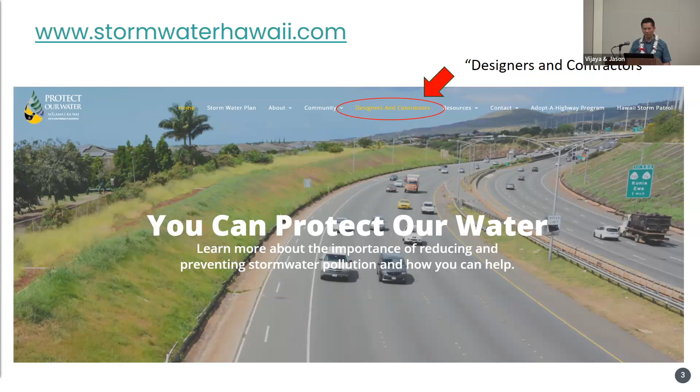For those of you who still have not downloaded a copy, if you go to stormwaterhawaii.com, they'll take you to the DOT Oahu District's website. There are actually two locations where you can download it from this site, so I'll show you where the better location is. If you go on top, along the middle, there's a designer and contractor link. If you scroll down, you come to this section, and this is where you want to go. There are links to the manual itself, and there are also links to take you directly to the post-construction BMP checklist, and to download the alternative compliance spreadsheet. There are also links to previous workshops and presentations, and you can also download the 2015 version if you wanted to look at that for reference.

And Vijaya is going to show you some links for the Maui District website as well. Okay, so this is the journey. Whenever we do an update to the manual, we try to improve upon the previous version, but the goal has always been the same, which is to improve stormwater quality, protect our water. So today's presentation is mainly a refresher. We want to focus on some of the key changes.

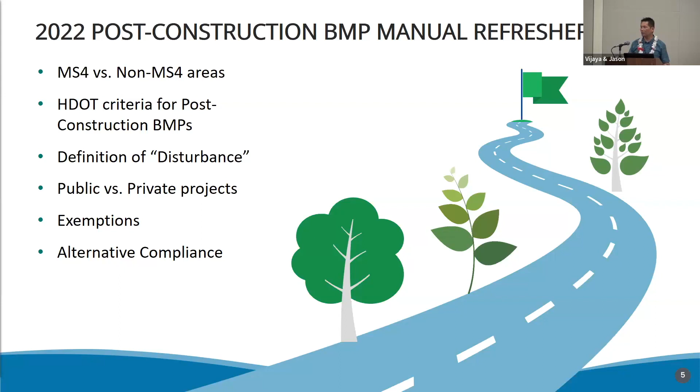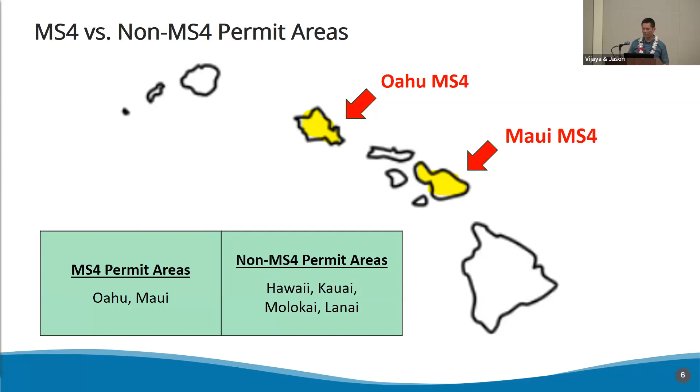One of the first ones is the MS4 versus non-MS4. We have different criteria for both. Oahu and Maui both have their own separate MS4 permit for urbanized areas. For Maui, the MS4 permit does cover the areas for Kahului and Paia, but to keep it simple, the entire island of Maui follows the same criteria. The non-MS4 permit areas cover the remainder of the islands, so Hawaii, Kauai, Molokai, and Lanai. This is important because there are different criteria. For MS4 permit areas, post-construction BMPs are required for projects that result in 1 acre or more of disturbed area.

And for non-MS4 permit areas, it's for public projects that result in 1 acre or more of new impervious area. The previous manual was consistent in that all locations were based on impervious area, but DOT wanted to be more aggressive in the amount of post-construction BMPs constructed. So we adjusted the criteria for MS4 permit areas, and that opened it up.

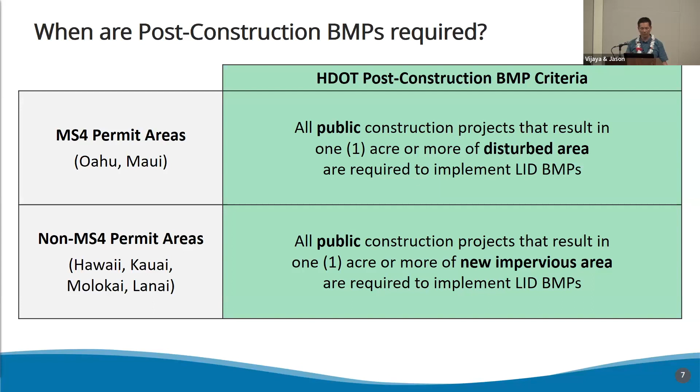So more projects are now open to possibly require post-construction BMPs. Because of that change, it's important to know how disturbance is defined. If you're familiar with Department of Health NPDES permits for construction activity, the definition is similar in that disturbance includes any construction activity that results in soil penetration. If you're working on paved surfaces, anything that exposes underlying base course.

But the main difference is that for the post-construction BMP manual, disturbance excludes activities that leave the soil intact, such as existing paved areas. It does not include staging and storage areas. The main reason is that the DOH NPDES permit focuses mainly on construction activity. So anytime you're driving on a paved surface, you may kick up dust or have oils that leak out from vehicles, but for the post-construction BMP manual, we're focusing on development and the permanent condition.

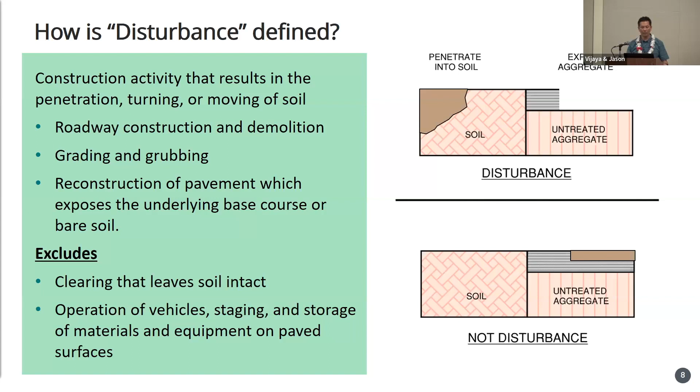Some of the questions DOT has gotten within the last year is how disturbance is defined for large projects, say if you have a large subdivision or a big box retailer. A lot of times it's on private property, but it does extend within DOT right-of-way, either for frontage improvements or access lanes into the property. So the disturbance area is for the total project area, not just the area within DOT right-of-way.

For phased projects, it depends on the timing of the project, but also takes into consideration the type of pollutants anticipated and the type of activity. If your project has multiple phases that are consecutive, it may make sense from a cost-effectiveness standpoint to do all the post-construction BMPs in the beginning. But if your phases are spread out over a few years, it may make sense to wait until phase 2 comes along. So the main intent is that you comply with the post-construction BMP manual, and it's left up to the discretion of DOT.

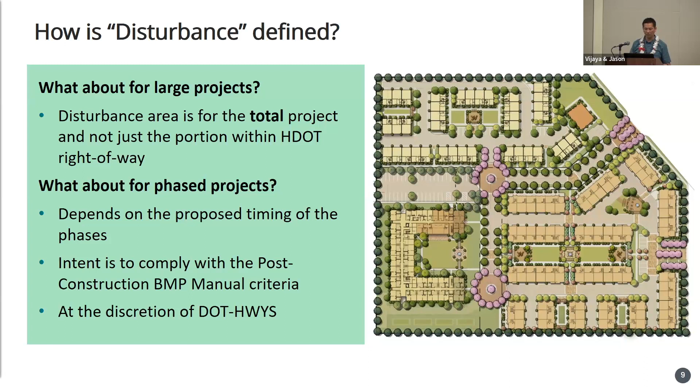Some of the new terms introduced into the new manual: we have this concept for public and private projects. Public projects are basically anything funded by DOT highways, either designed in-house or by an engineering consultant, and then constructed by DOT highways or a private contractor. These projects are located within DOT highways or a parcel owned by DOT highways.

A private construction project is basically anything else. So it's not specifically funded privately, but could also be a city and county project or another project by a public agency. These projects are partially within or adjacent to DOT highways, or drain to the DOT highways right of way. So there's different criteria for public as well as private projects.

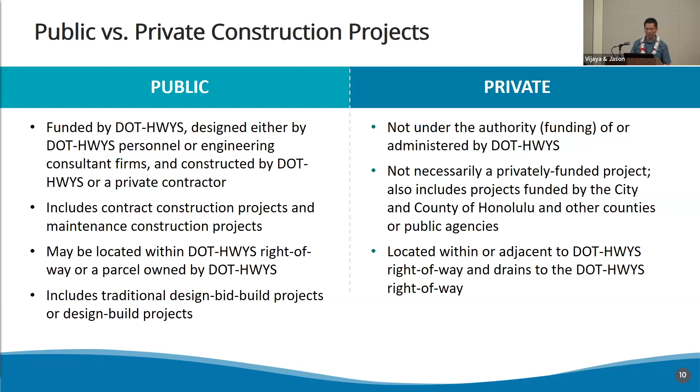We also have these concepts for new development and redevelopment. These were in the previous manual, but we tweaked it a little bit. For new development, we're focusing once again on new impervious surfaces, but we added that it's intended for vehicular use. This is based on studies that have been done across the country.

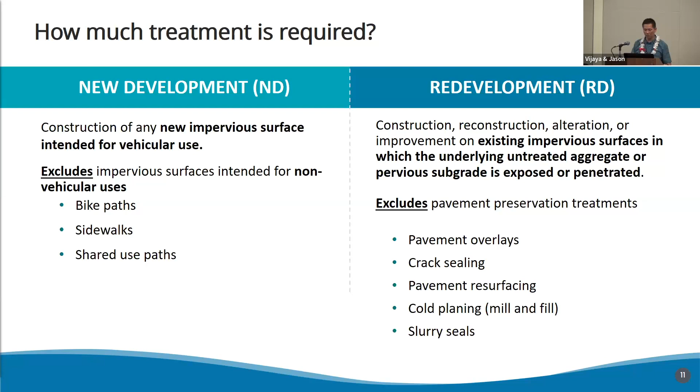This is the only formula I'm going to have, unlike Doug, who is way smarter than I am, he had tons of equations shown. But the amount of treatment required is based on basically 3 components. The first component is the new development, which is basically your impervious surfaces.

Your second component is your redevelopment. What I want to focus on is that you're not required to treat the entire area for redevelopment. For MS4 permit areas, you're required to treat 25%. That's because if you have existing pavement and you're doing reconstruction, the impact is not as great as if you had a grassy field and you're building a new road. So the impact is not as great, and we allow for that reduction.

The last component allows for a credit for existing treatment. Just note that this is not automatic, so you do need to negotiate with DOT because there are a lot of factors involved, such as what type of treatment is there, whether that existing device has been maintained properly, and how effective it is. So that's a credit that's on the table, but it needs to be worked out with DOT with their approval.

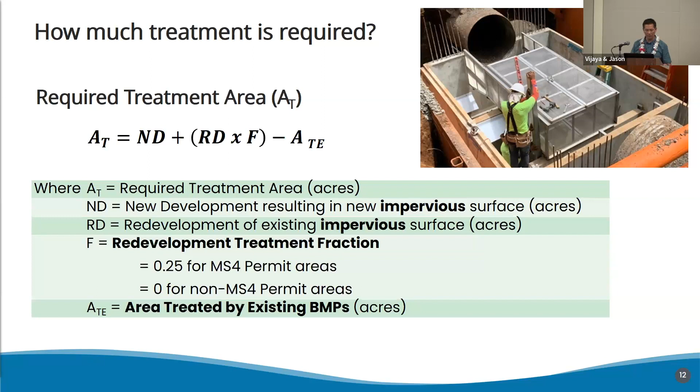And what type of treatment is required? So the progression that the designer needs to follow: LID needs to be priority, mainly infiltration and any method to try to match the pre-development hydrology. We don't want to increase flows downstream.

If that is not feasible, the next step is to look at traditional non-LID, which is typically filtration, sedimentation. And only if those two are not feasible, then you can look at proprietary devices such as hydrodynamic separators, baffle boxes.

A lot of times, like Doug mentioned, the DOT right-of-way is very limited, so there's space constraints, and that's where low-impact development may be difficult to achieve.

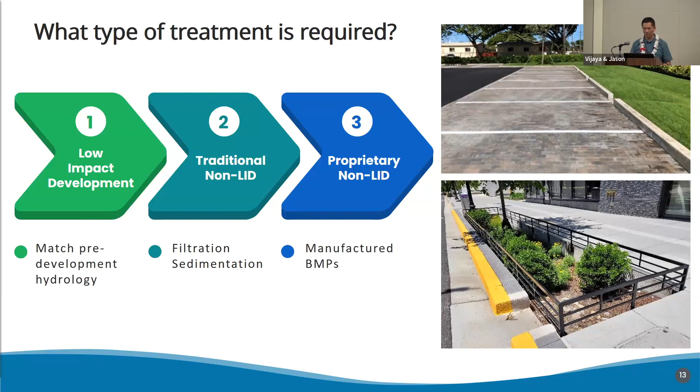The current manual has introduced a new system for tracking. So if your project does treat more than what is required, it'll generate a credit. If your project is less than what's required, it'll generate a debit.

And what this does is allows DOT to basically track compliance. So at the end of the year, they can take a look at all the projects that came through, and they know exactly how far they're either above or below.

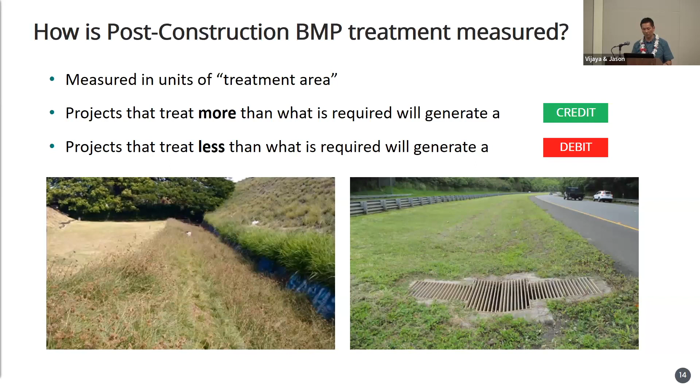Definitely you want to have a credit. If you are falling short of your required treatment area, they do allow for alternative compliance. So this is also new to this current manual.

So just be aware that the BMP manual is a guideline only. So if you do your calculations and you're short of treatment, make sure you can look at different types of treatment, different devices, change your approach. Just because it's not in the manual doesn't mean that it's not allowed. You're allowed to use your expertise and you can suggest something else for DOT approval.

If DOT does approve it and they agree that all options have been looked at, they do allow for this alternative compliance, which is going to be addressed in a future project in a different watershed with an equal or higher priority. This alternative compliance is allowed for public construction projects only.

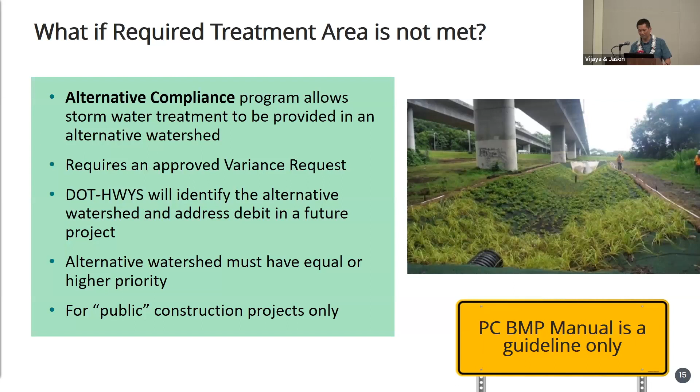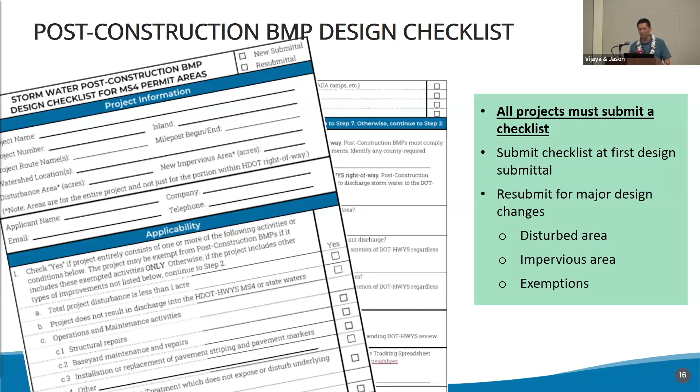Within the last year, probably the most questions that DOT has is basically how to fill out this checklist. So just to clarify, all projects that are submitted for DOT review need to submit a checklist, regardless if it's a public or private project, regardless if it's an MS4 or non-MS4 permit project.

And just make sure that you submit the correct checklist, because each one is different depending on the criteria.

The yellow is something that we've added since the manual first came out, and it's to address the question we had about disturbance and impervious areas. The question was, how do you calculate it? So we added a note just saying that the entire project area needs to be considered, and not just a portion within state right-of-way.

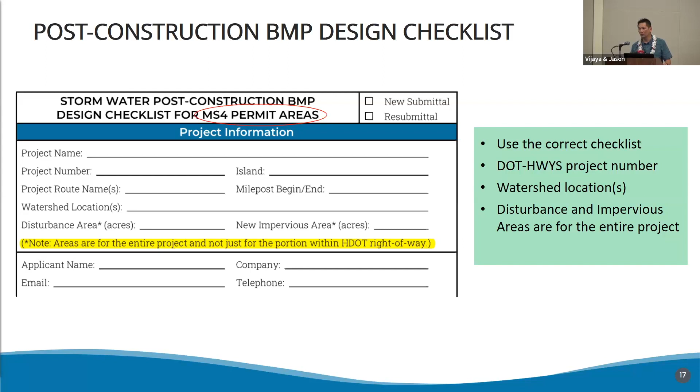And we also have a lot of questions on section 1, which is basically, is your project exempt from post-construction BMPs? So only fill in these boxes if your project only consists of these activities.

For example, in the middle of your screen, item C3, installation or replacement of pavement striping and pavement markers. So if you have a new road, brand new road with pavement striping, you would not check this box, right? So only if you have an existing road that you're not introducing any new impervious surfaces, if you're just replacing the pavement striping, then that's where you would check this box.

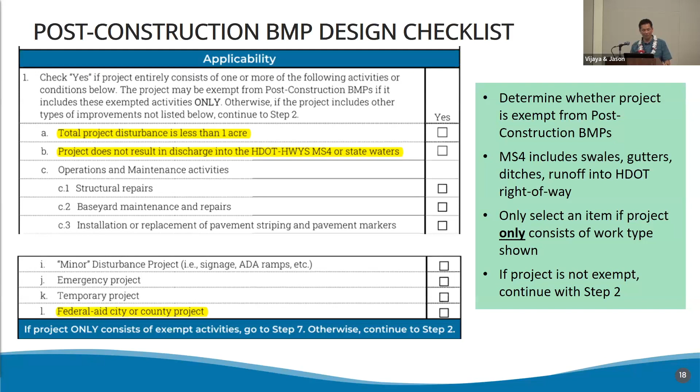If not, if you are doing work that is not exempt, you have to continue on to step 2. As a designer, make sure you read the steps. We tried to make it as clear as possible, and at the end of each statement we direct you which number to go to. Some consultants have been checking every single one, but if you follow it, you may be allowed to skip ahead where indicated.

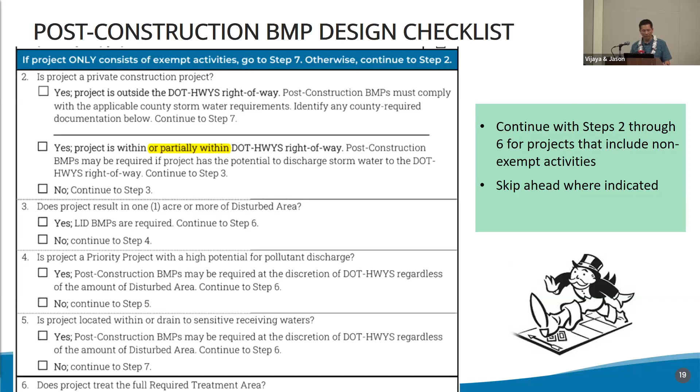And then the last change that we made to the checklist, we also have the compliance tracking spreadsheet, and we wanted to kind of tie them together. So we've added this link. So as you finish your checklist, you can click on the link that should pop up your compliance tracking spreadsheet. And Vijaya is going to go over that as well.

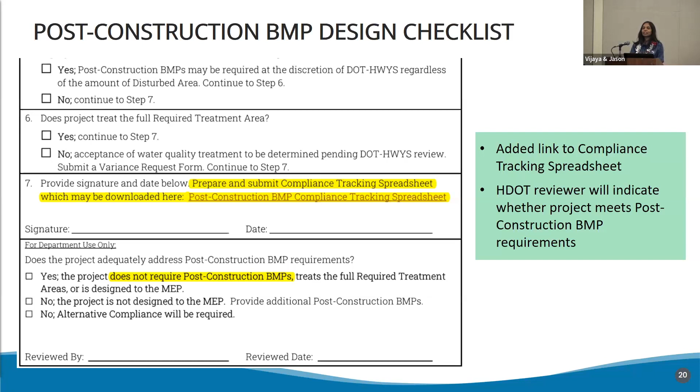Good morning, everyone. I am going to be presenting the Stormwater Post-Construction Best Management Practice Manual updates from HDOT Highways Maui District's perspective. So similar to Oahu, Maui District has their own web page, which is stormwatermaui.com.

And similar to Oahu, we have a resources page that will take you to all the resources that we have. If you go under the resources for designers and contractors, you will get all the resources, the construction BMP field manual, post-construction BMP manual, and all that information.

If you scroll down on that resources for designers and contractors page, on the very bottom, you will see, very similar to Oahu, we have listed the post-construction BMP requirements, because these are the questions that we've been getting. Okay, my project started in 2014, which checklist do I submit? Or my project started in 2022, which checklist do I submit? So we've clarified here, gave you both the manuals 2022 and 2015, and all the checklists are provided there as well. So it's very similar to Oahu's, and it's just another way for Maui designers to go find that data.

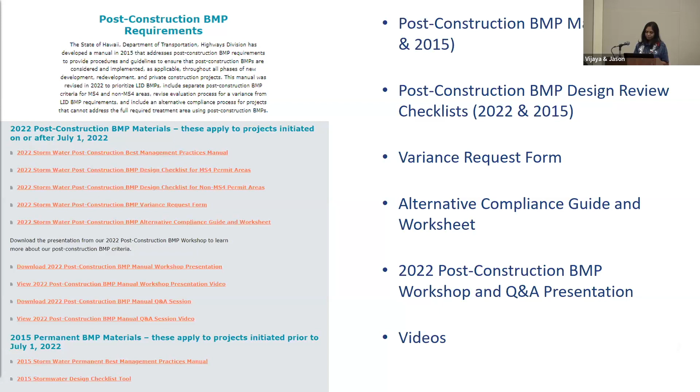In terms of implementation, HDOT Highways Maui District has reviewed 74 projects since the 2022 manual became effective on July 1st, 2022. Of these, 30 projects were public projects and 44 are private projects.

In the universe of 74, we had a total of 35 permit projects. And I'm talking about permit projects because our review process is primarily triggered through the permits. It's when people come into permits for permit to perform work or permit to get a connection or a discharge permit. So that triggers most of our plan reviews. And so we had 17 public permit project reviews and 18 private permit project reviews since July 1st, 2022. That's about 47% of the universe.

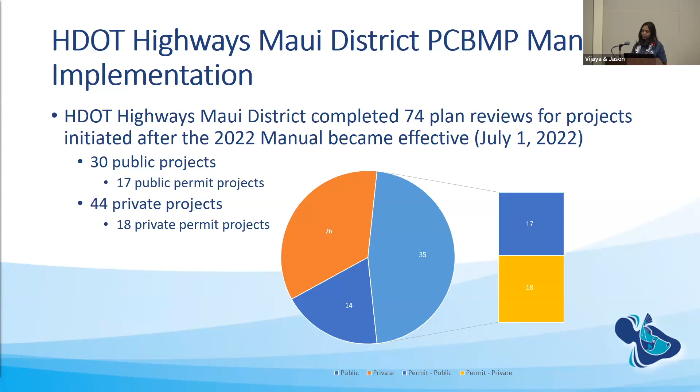So of the 74 plan reviews we did, 58 projects were exempted from post-construction BMP requirements. And I'll talk about that in a second. And even though they were exempt, one of the projects actually implemented an LID post-construction BMP. And I'll also share that in a minute.

And then the remaining projects, 16, are currently under review. Of these, interestingly, I did some data analysis to get all this data. And then we found that 2 private projects right now with access connections that require PCBMPs are asking for a variance. And it's under review, it's not been approved, so that's ongoing.

And the reason for all these exemptions for the 58 projects is because primarily we receive a lot of permit projects. We really don't have big roadway redesigning or new roadway construction projects going on Maui, and nothing since July 1st, 2022. So that's why most of our projects fall under the universe of exemptions.

And so most of our permit projects that came in are test pits, utility installation, relocation primarily related to sewer water laterals, telephone poles, and electrical poles. And then we had some access connections, driveway, repaving, and things like that.

And then private projects that came into us did not either discharge into state MS4 or they did not disturb more than an acre, and therefore they got an exemption.

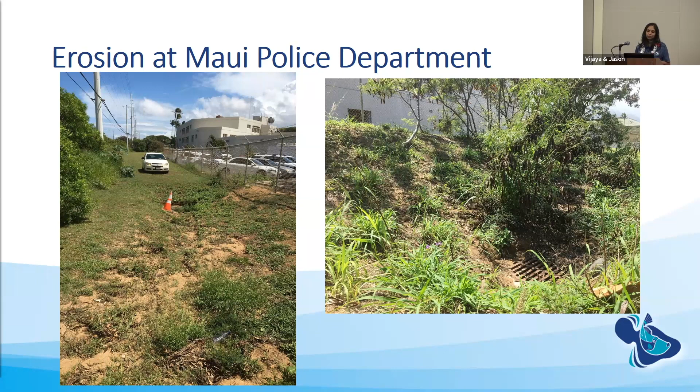So our first project, erosion at the Maui Police Department, here are some pictures. You can see it's clearly eroding and entering the storm drain system. This is behind the Maui Police Department parking lot, fronting Kaahumanu Avenue.

So we designed a project to include a couple of bioretention basins and a grass swale. And this is the scope of work. We are installing some temporary irrigation, soil amendments, and landscaping to support the bioretention basins and grass swale.

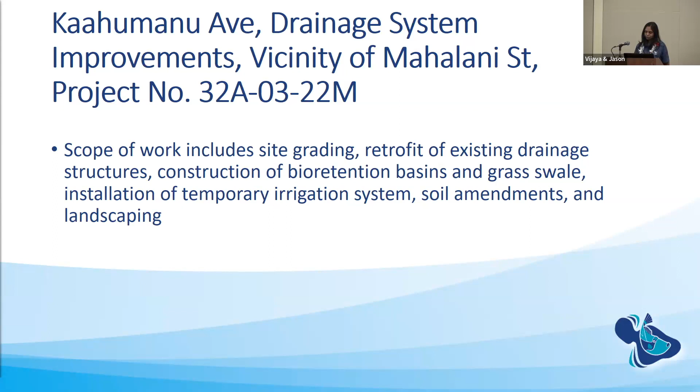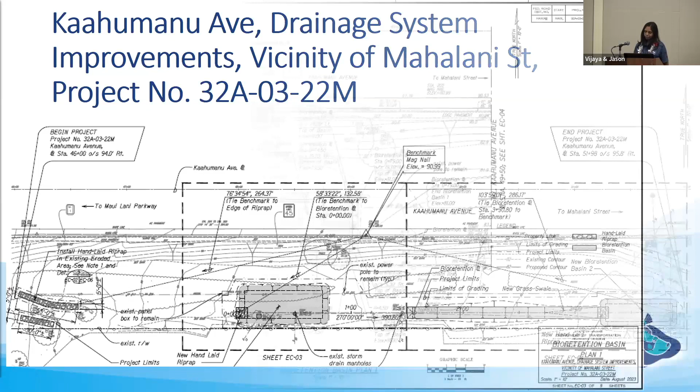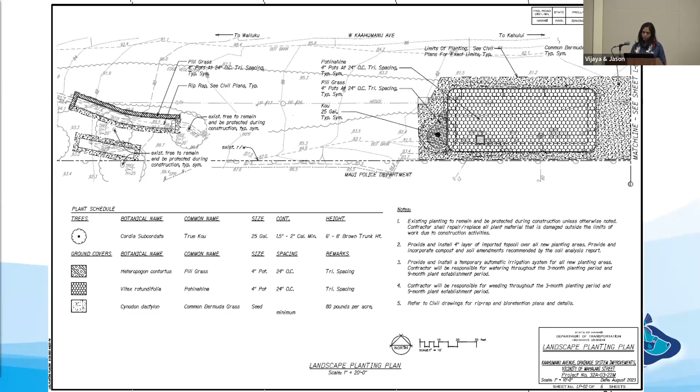The design for landscaping includes pili grass, pohinahina, and Bermuda. We are also installing a couple of trees as a part of this project. So in conjunction with maintenance, we decided that kou trees would be better for future maintenance. So that's what they chose. And we are installing a couple of those under this project.

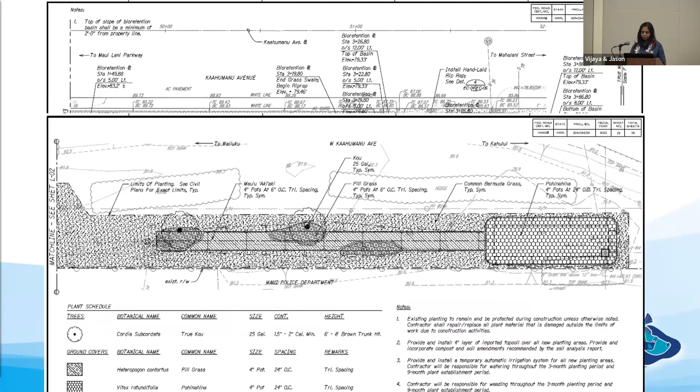Here's the plan view showing basin 2 and the grass swale. This is the landscaping plan for the same, pretty much using the same landscaping for basin 2 and the grass swale as well.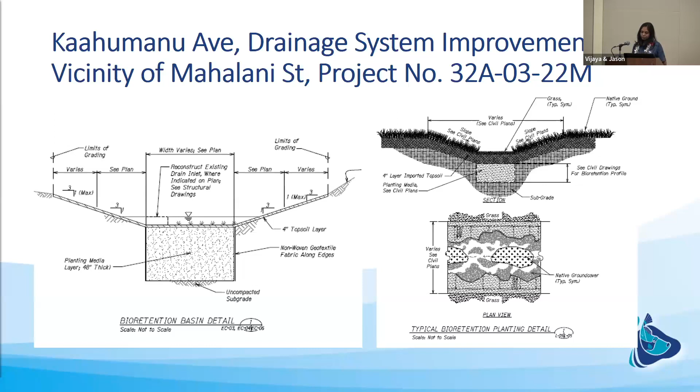In terms of the status of the project, we had a pre-bid meeting on November 2nd. The deadline to request to submit RFI questions and substitution requests was 2 p.m. yesterday, and the deadline to submit bids is November 27th. So hope some of you will actually bid on this.

Moving on to our second project, this was the project I was talking about, erosion at the intersection of Stable Road and Hana Highway. So this is what it looks like. It was primarily being used as a staging and/or parking area.

This project interestingly came to HDOT Highways Maui District as a public complaint. Even though we addressed the aspects of the public complaint that came in, when we looked at it, they decided that they wanted to do more, so they decided to implement a permanent erosion control measure at this site.

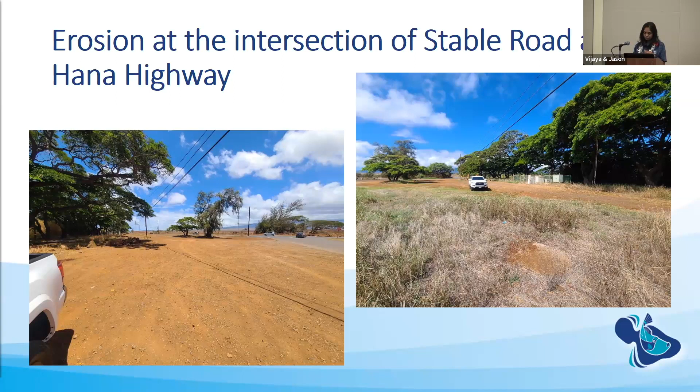So here you're looking at the drainage area of the site. There's really no existing storm drain system either along Hana Highway and/or Stable Road, which are basically in the DOT's right of way. The drainage basin you're looking at, at the top of the screen above the bike path, is basically privately owned for that subdivision and is maintained by the HOA.

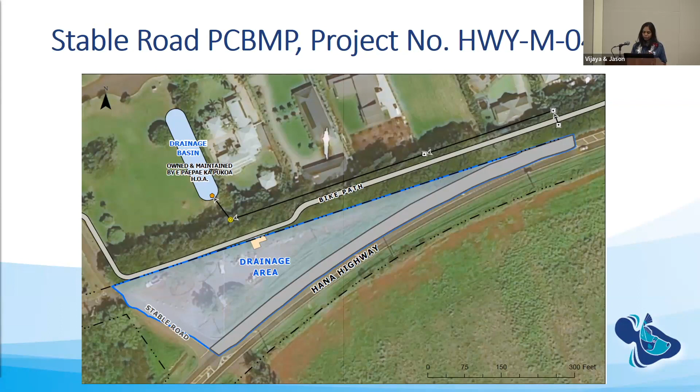So we are looking to install either bioretention or bioswales at this location. The area has a couple of challenges with the presence of utilities and providing access to MECO and other utility companies. So this is our preliminary layout that we came up with.

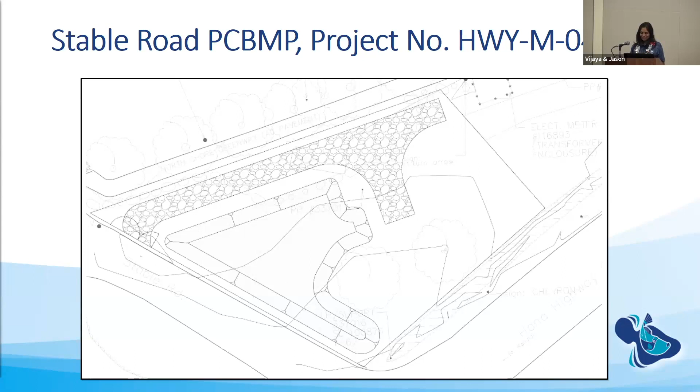We're still working on the design, and this project's design is slated to be completed in April 2024. And then taking on Jason.

So that was all about our projects, and we are now moving on to the updates to the manual. As Jason mentioned, he showed you guys the updates to the checklist, which then linked to the PCBMP compliance tracking spreadsheet, which was previously known as the alternative compliance tracking spreadsheet.

We realized that the naming convention is kind of confusing because it leads you to believe that it's only required for alternative compliance, and the manual doesn't really say when you need to submit it. So that's why we took a good look at it, and we changed the name to PCBMP compliance tracking spreadsheet, and we also made some changes to the spreadsheet itself.

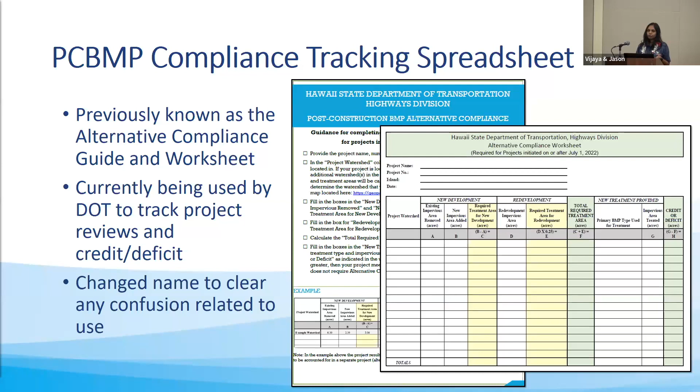Currently this alternative compliance spreadsheet is only being used by DOT to track their project reviews, and I do not believe any of the designers are actually using it.

So in order to make it more usable for both designers and DOT, we made a decision to split it into two separate files, one for the designer and the other for DOT. The designer spreadsheet will focus on just the design elements, help you track the calculations, and provide DOT an overview so they can figure out whether you're having a credit or a deficit. That was the main intent.

We added a guidance tab to both spreadsheets to make them more user-friendly. We also added Maui watersheds so that designers can select the Maui watersheds, because this spreadsheet will be used only for MS4 permit areas that Jason was talking about, which are essentially the islands of Oahu and Maui.

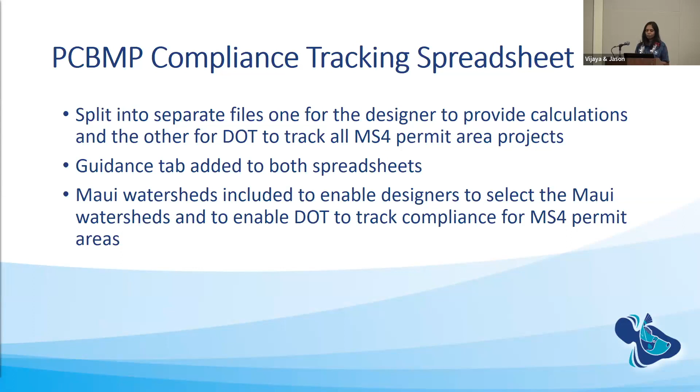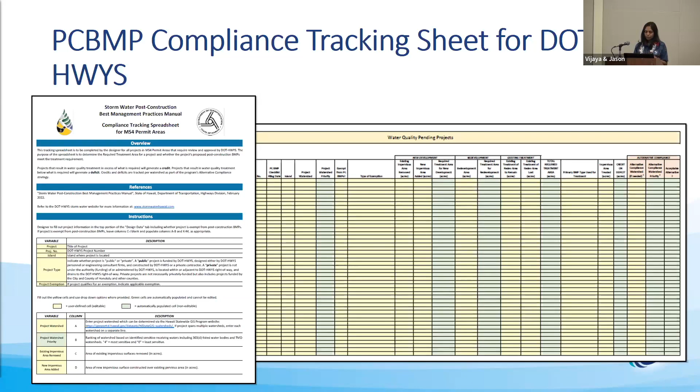And then we are also going to make this a requirement for all projects, and that includes exempt projects as well.

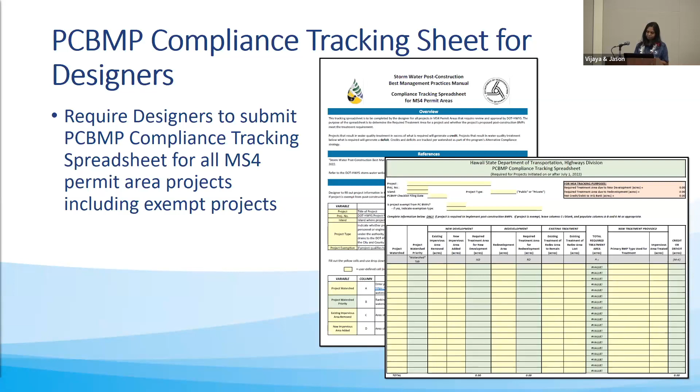So I'm going to talk about the compliance tracking sheet for designers. Please bear with me because I had a brilliant idea of using Excel.

I came up with a made up example on how to find your watershed and how to enter the design data, and use it in Excel. So we're going to try and use the Excel and show you how to enter the data. It's just a preview. If you have any questions when this rolls out, you can always reach out to DOT or to us. So while he pulls up the Excel...

Okay, so right now I have a magical Excel that you can't see. You want to see it? Yeah, can you show them once, and then pull it back.

So that's the Excel. The idea was that I was going to show you how to scroll through the Excel. What are they seeing? I'm not able to see.

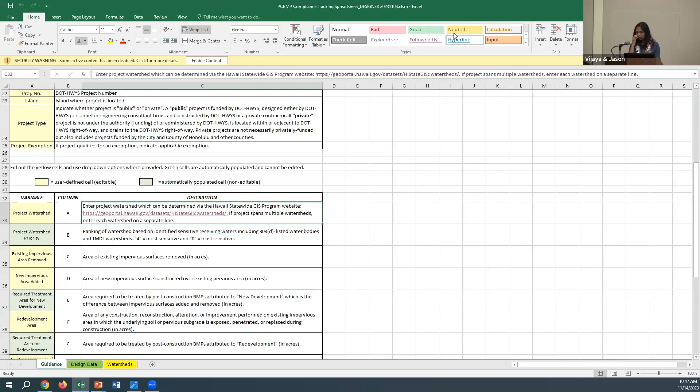So you're in the guidance tab right now, but I will go over it. It's pretty much self-explanatory. The top portion has the intent of why we created the spreadsheet, then it has some resources for websites and where to get additional information. On the bottom, all the yellow cells are the user entered cells, and all the other color is basically pre-calculated. So when we actually roll this out, it's going to be all locked. You'll only be able to enter data into the user fields, which are the yellow cells.

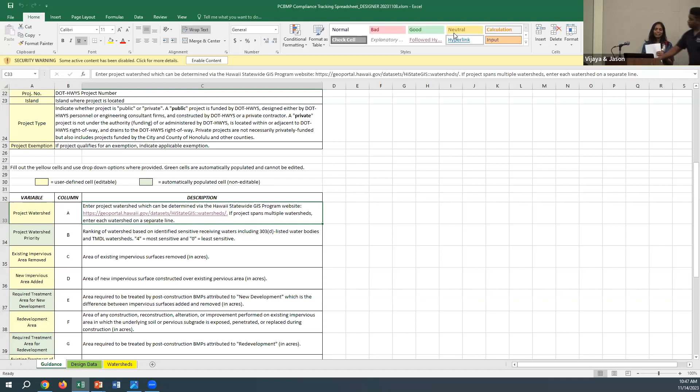I apologize for the snafu. So one of the things I wanted to show you was a made up project where I talk about what happens if you have two different watersheds, and where you find the information for the watersheds. The link for you to know which watershed you are in will be provided in the guidance sheet under the watershed user information. So if you click on the link, it'll take you to a map showing your project area.

Right now, the project I made up for this presentation is on Maui, of course. I'm representing Maui. It's a roadway widening project on Hana Highway from Kaahumanu to Haleakala Highway, spanning two watersheds: Kalialinui and Iao. We're proposing to add 3 acres of new impervious in Kalialinui watershed and 2 acres of new impervious in Iao. We're going to install an enhanced swale treating half an acre in Kalialinui watershed, and install a series of bioretentions, since there's plenty of median space on Hana Highway, in Iao watershed, treating 5 acres using those. So that was the example I was going to show you.

I'm actually going to type it in and I'll show you.

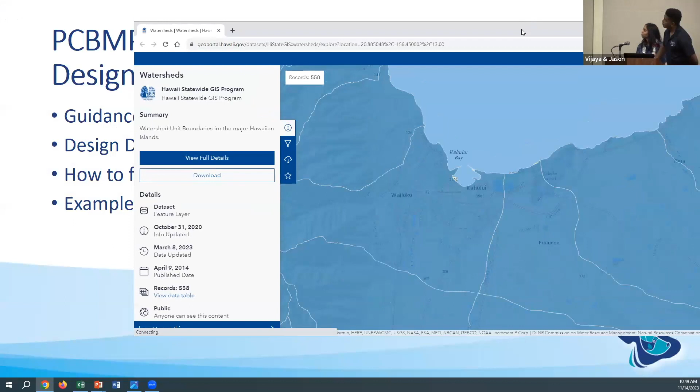The other thing I wanted to mention is each watershed has a priority, like Jason mentioned. The watershed priorities are based off of DOH's 2022 water quality data for the 303(d) watersheds and the TMDL watersheds. The ranking goes from 0 to 4, with 0 being the least ranking and 4 being the highest ranking. Thank you.

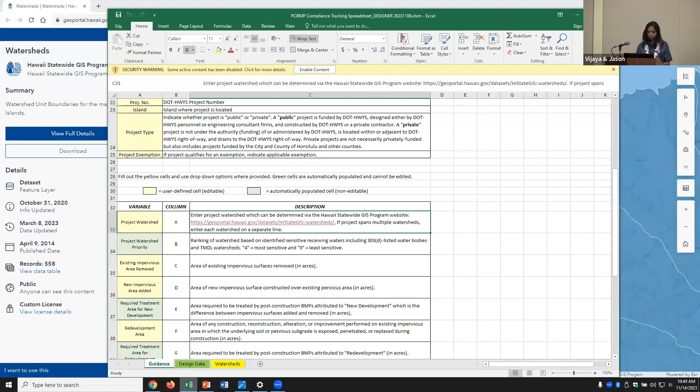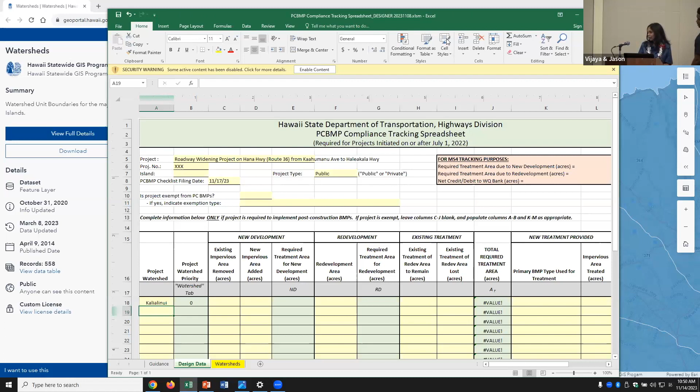You can't really see it, but I'm typing the watershed names. So I typed in Kalialinui, and it automatically showed that the priority of the watershed is 0.

So you wouldn't need to do anything whenever DOH updates their 2022 data, which typically happens every 2 years. In 2024, we'll probably roll out another spreadsheet at that time. When I type Iao, it has a higher priority, 1.

I'm actually typing in the numbers that you can't see, but I'll show it to you in a second.

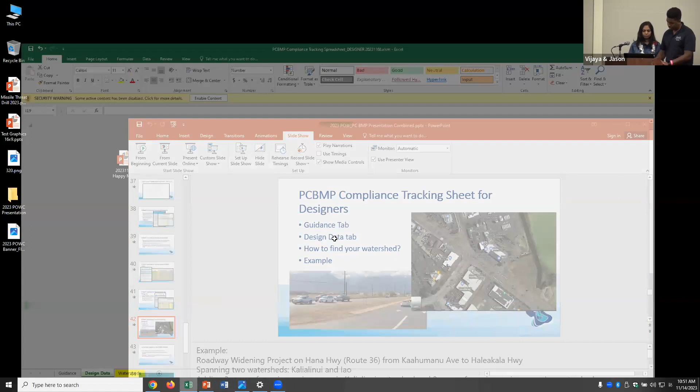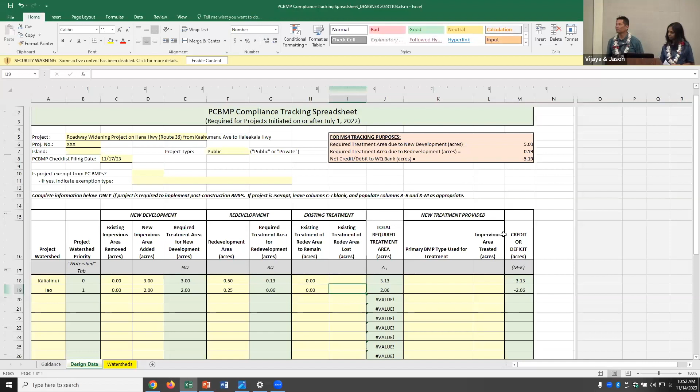Good morning, I have two questions. The first question is in terms of alternative watershed compliance, what are the criteria considered to determine whether or not a project in an alternative watershed will be accepted?

So that's going to be left up to DOT to decide. Every watershed has a priority assigned to it, based on TMDL's waste load allocations. So as long as your alternative watershed is equal or higher priority, DOT may choose to plan for a future project within that watershed. It allows for different options so that in case there's space constraints or groundwater issues, they have options to locate a new project. The theory behind it is you're looking at the island as a whole, so if you have a deficit in one watershed, you can pick it up in another one and balance it out.

Is it within a single island? Is it per island? Yeah, so you can't transfer it to a different island. It's within the same island.

Okay, so how do you address environmental justice issues then? Say, for example, there's areas in the urban corridor that are very constricted, and someone were to propose a project in another watershed that happens to be in a demographic area that is disadvantaged, either economically or socially. How is that factored into the decision making?

So that all needs to go into DOT's decision on which watershed. It's similar to a new project, right? They'd have to get public buy-in and outreach. So just because you have an additional or different watershed identified, they still need to go through the process and do their due diligence and see whether it makes sense, if additional permits are required. So this is just one option that needs to be looked at, alternative compliance. We still need to look at all the other factors that go into a typical project.

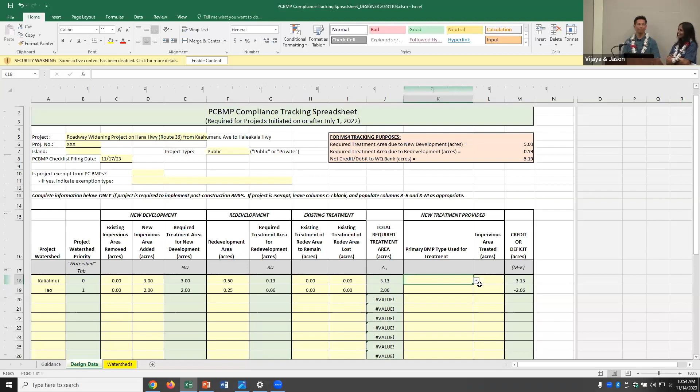Also remember that the alternative compliance only works for MS4 permit areas, so that's only Oahu and Maui, and it only works for public projects. At this time, DOT is not looking at giving alternative compliance credits to private projects. Private projects would have to meet all the criteria that DOT has, and additionally meet all the criteria of whichever county requirements they're in. So for example, if it's a project on Maui, they would have to meet all County of Maui requirements and DOT requirements. There will be instances where they might request a variance, and that will be reviewed and approved on a case-by-case basis.

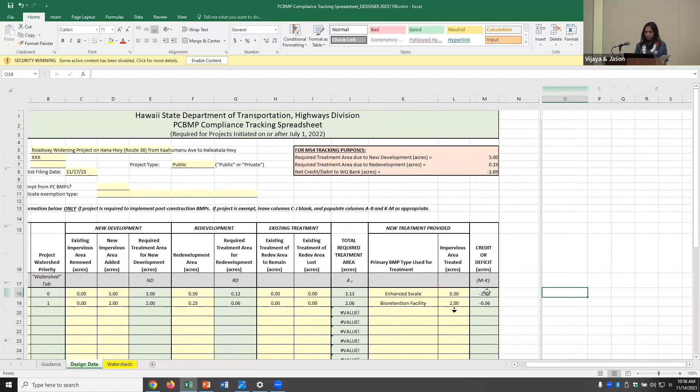2.63 acres. But in Iao, which is a higher priority watershed, there's a lot of room in the median to install bioretention, so we've installed more than needed. That was supposed to be 5 acres, sorry. So we installed multiple bioretentions in the median, and we're able to treat 5 acres. So then you have a credit, because you're treating more than you're required to.

So overall, if you look at the top orange box, you'll see that the required treatment was 5 acres total, and then the net credit is 0.3 acres. In this example, because you provided additional treatment in a higher priority watershed, which is Iao, this would be acceptable for DOT if you submitted this. But if you switch the priorities and you were treating more in Kalialinui but end up getting a deficit in Iao, I'm not sure how DOT would look at that. I don't think DOT would approve that.

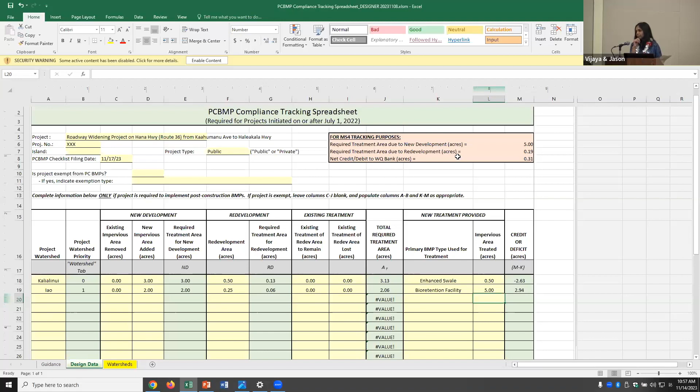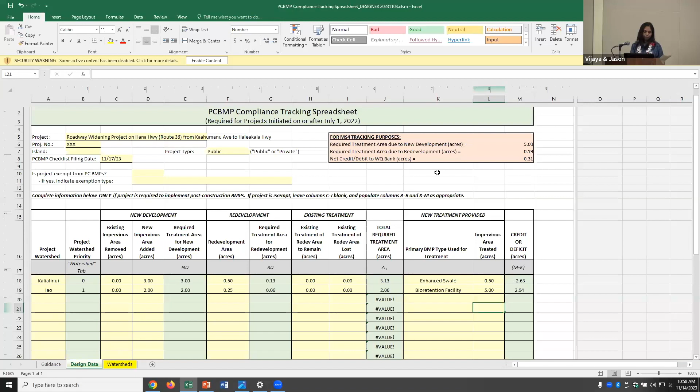That was the example we were trying to show you. That's it. Any questions? Final chance, any good questions?